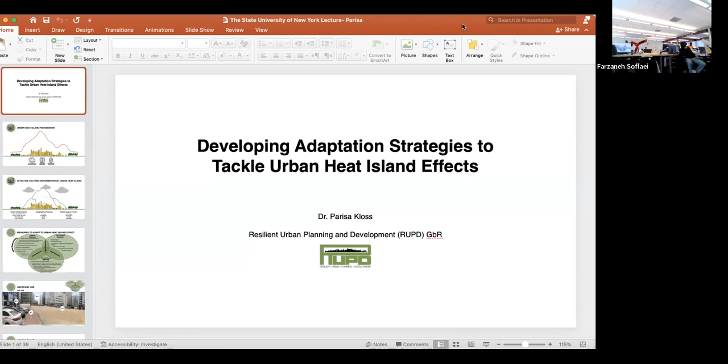So we are happy today to have Dr. Parisa Kloss. Dr. Kloss is a trained architect and urban designer and planner with more than 20 years of experience in the Middle East, Asia, Africa, and Europe. She is also the founder and executive director of Resilient Urban Planning and Development in Berlin, Germany. Parisa is an expert in urban climate change planning, urban heat island effects, and sustainable and resilient cities. She also has some collaboration with UN Habitat, United Nations Habitat, as an urban thinker.

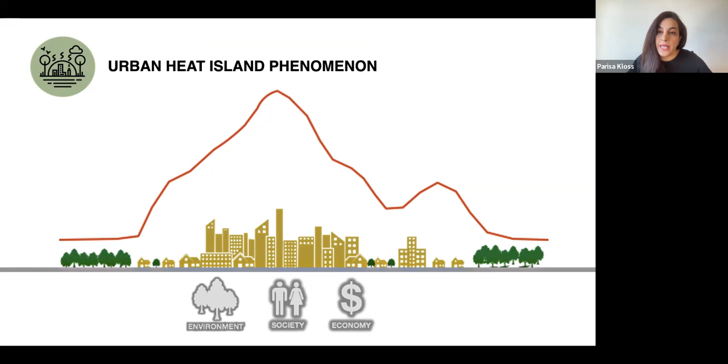It can impact social aspects of life, like the health of the citizens, so it can be a tremendous threat, especially for vulnerable people like the elderly, children, or people who have serious health issues. Or it can impact economic aspects of life, like waste of natural resources. For example, higher temperatures in cities increase cooling energy consumption and water demand for landscape irrigation. This will increase the peak electric demand. As a result, we need to produce more energy, and this will trigger the release of more greenhouse gases due to combustion of fossil fuel.

The exact form and size of this phenomenon varies in time and space as a result of urban characteristics, locational, and meteorological factors. Basically, the urban heat island morphology is strongly controlled by the unique character of each city.

Do you have any question?

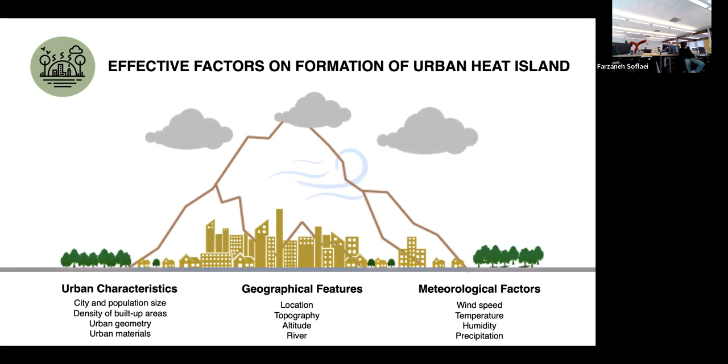No, we are good. No questions yet. Yeah. Yes, sure. If you want to ask any questions, you can interrupt me, no worries. No, we are good now.

Okay, so basically, how big is our city? How is the population size? How dense is our city? How is the urban geometry? The materials that we are using in urban areas, are they low albedo materials or high albedo materials? They are dark. What is the albedo? Albedo is the rate of reflectivity of the materials.

If we have higher albedo materials, it means they can reflect the solar radiation and send it to the atmosphere and try to cool down the city. And they're not absorbing it and emitting it after sunset, creating these higher temperature differences between urban and rural areas that we call urban heat island. And even urban activities in urban areas can be responsible for the urban heat island intensification.

Or where in this world are cities located? Is it near the river? Is it near the sea? How is the topography, the altitude? Is it surrounded by mountains? Or meteorological factors? How strong is wind speed in our cities? If we have a strong wind speed, it can take the pollution and also heat out of the city and cool down the city.

If we have a low wind speed, it can contribute to accumulation of heat and pollution over the city and create a dome of stagnant warm air over the heavily built-up area and increase the intensification of urban heat island. Temperature is going to help intensify the urban heat island, humidity, precipitation. So there are different factors that can contribute to intensify urban heat island. But I'm not going through each of these factors, but if you have any questions, I can open it up.

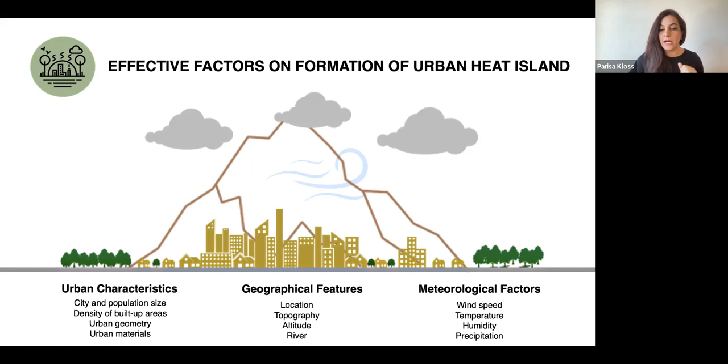And I would like to immediately dive into the measures that we are using to adapt to the urban heat island effect, and then introduce you to projects that might give you some ideas for your design project. This is the classification that I did. I divided different measures in three categories: physical measures, technological measures, social and cultural measures that we can use to tackle the issue. But actually, this is my classification. You can come up with a new classification.

For example, physical measures, like using building greens, green walls, green roofs, urban green areas connected to gray infrastructure, green corridors, street trees, house gardens, parks and natural green areas, community gardens and green indoor areas. Blue areas like rivers, lakes: if you have a river in your city, you can bring a part of the river into that target area and cool down that urban area a little bit. Using natural material or high albedo material, permeable surfaces, cool roofs, cool pavements, using different shading devices.

These are the general physical measures that you can use, but depending on the context of your city, you can come up with new or even innovative measures to tackle the issue. We are not saying that you should definitely use these measures. But these are the general, already proven measures that you can use in your cities. And these green and blue measures can be classified under nature-based solutions, that we call NBS.

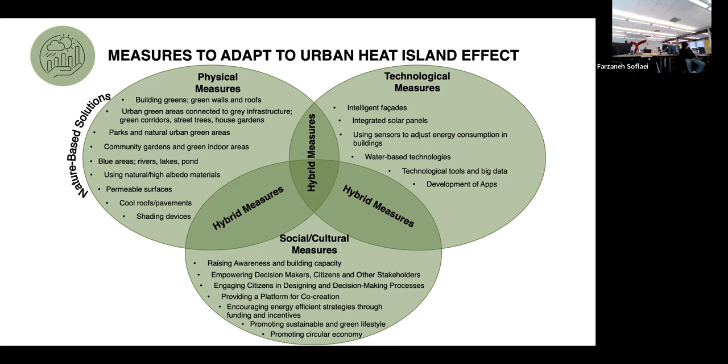I'm always saying don't put all your eggs in one basket. Try to distribute them, because if you are choosing different kinds of solutions, they can have more impact on that area. And the other category of measures is technological measures, like using the intelligent facade that can adjust itself based on the solar radiation, and also integrated solar panels. But again, it depends on the context of the city. How robust is our infrastructure? How robust is our system that can accept another technology on top?

Is the infrastructure not vulnerable, or if we are integrating another technology on top, can it be more vulnerable? In that case, we have to upgrade our infrastructure and then integrate technology, or integrate technology for the new buildings from the beginning, or use sensors to adjust energy consumption in buildings, and water-based technologies,

technological tools and big data. We have two different technologies that we can use: for example, using technology as a physical measure that can be integrated in infrastructure and systems, or using technological tools and big data that can help us identify the hotspots in the city in the best way, and take sustainable and smart actions toward the reduction.

So basically, this technology has already improved and can give us opportunities to facilitate or ease the process of identifying the challenges, and also developing different scenarios to tackle the issue, or developing different apps, like, for example, where are the hotspots, when is it hot, when we shouldn't go out, or what kind of clothes we have to wear. These kinds of apps also exist that can give us ways to avoid some health issues, especially for the people.

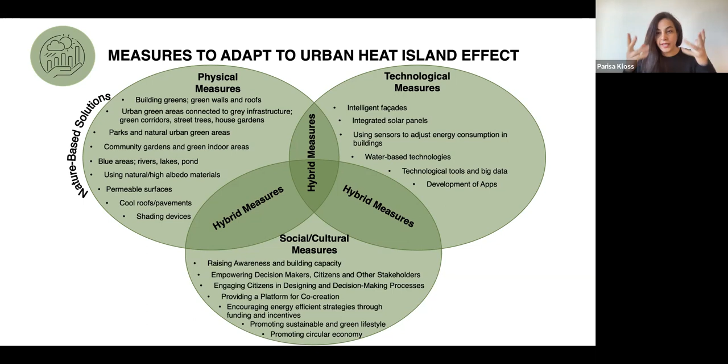I have selected 4 projects to present here. 2 design-based projects used more physical measures, and 2 technology-based projects mostly use technological tools to develop a platform to identify the hotspots, prioritize them, and develop scenarios to tackle the issue. So maybe these projects can give you some ideas. Sorry. So the first project that I would like to introduce to you is located in Abu Dhabi, United Arab Emirates.

The measures that we use in this project are mostly focusing on green and blue strategies like nature-based solutions. We also use natural and high albedo materials, permeable surfaces, different sorts of shading devices, as well as water-based technology. So I'm going to introduce you to this project here.

Can I just jump in for a second? Yes. Because I don't know what Celsius or centigrade means, so I just did a quick conversion. 39 degrees is 102 degrees Fahrenheit. I just want to put that out since that's what our students will understand. And 60 would be 140.

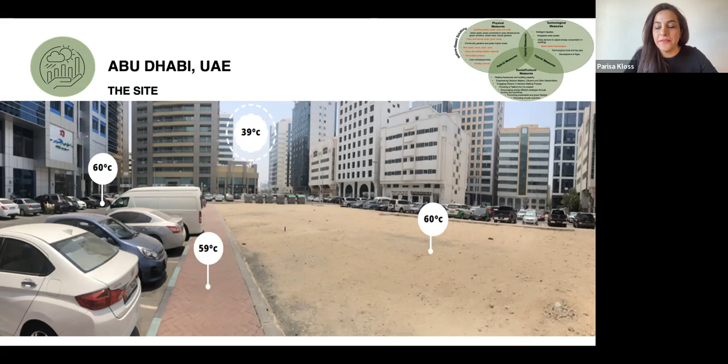Yes, and sometimes it can reach 80 degrees centigrade, and you can give it a try. If you are in a really hot urban area, you can cook an egg on top of the asphalt. This is also one of the issues in these kinds of areas. So you can see that this is the site that we have to intervene. It's surrounded by buildings. It's a jungle of buildings, and the greenery is already crowded out.

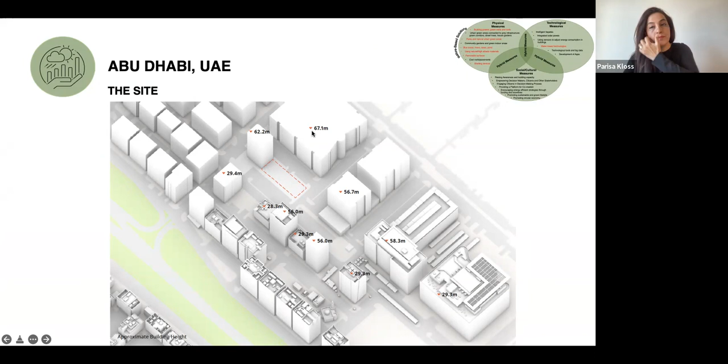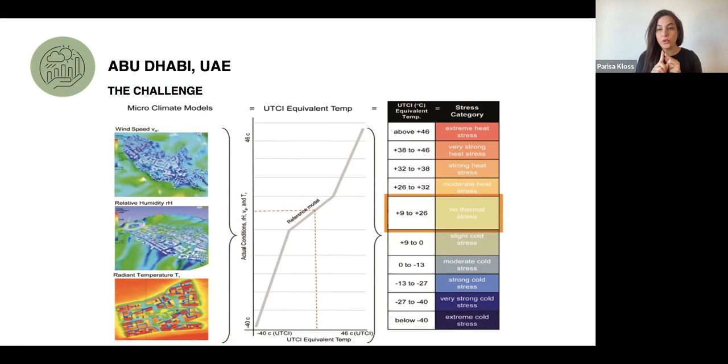The height of these buildings ranges from 28 meters to 67 meters. The challenge in Abu Dhabi is that throughout the year, Abu Dhabi experiences a wide range of thermal stress levels, ranging from 9 to 26 degrees centigrade to above 46 degrees. So one of the biggest challenges in Abu Dhabi is extreme heat stress that we have to tackle. It's happening between April to October, the hottest months of Abu Dhabi.

Before we started our design, we looked at different local architecture, structural elements, or even phenomena that can help us create a structure to cool down the city, coming from that context. So we were inspired by oases to mitigate the urban heat island effect and provide thermal comfort and a pleasant environment for inhabitants. The oasis is a phenomenon that occurs in desert areas, which is also the case in Abu Dhabi, and so we were inspired by that.

An oasis is a green area in the middle of the desert, centered around a natural spring or a well. It is almost a reverse island in a sense, because it's a tiny area of water surrounded by a sea of sand or rock. The oasis effect refers to the creation of a local microclimate that is cooler than the surrounding dry area due to evaporation or evapotranspiration of a water source or plant life, and the higher albedo of plant life than bare ground.

So we were inspired by this oasis, and we tried to create another oasis in an urban area, not in the desert. Here you can see in this picture our oasis in this urban area surrounded by these buildings. We tried to design a public space with different functions, with a 40 meter structure that combines physical and technological measures to achieve high impact in that area. We tried to tailor modern architecture and state-of-the-art technology to the local context through the structure, shape, and its details.

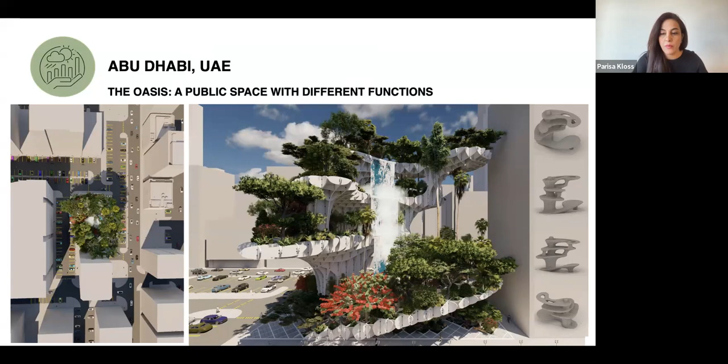So located between buildings, the oasis also creates many environmental, economic, and social, as well as aesthetic benefits for the local neighborhoods. So we try to see all the aspects of life. It's not just that we're trying to mitigate the urban heat island effect and have environmental impacts. If we want to achieve the sustainable development goals, we have to consider all different aspects of life in our design.

So this project could mitigate the urban heat island effect and cool down the urban area by distributing greenery onto different levels, or by elevating the oasis. Evapotranspiration is increased, which contributes to creating lower temperature spaces in an urban area. And since the urban heat island occurs at different levels, this is also really important.

We have to think that the urban heat island is not happening only in the air. It's happening on different levels, ranging from subsurface to the air. So the elevated greenery can mitigate the urban heat island effect at all the levels through the vertical mixing of air, and can improve air quality indirectly through the reduction of surface temperature, and also reduce thermal air movement.

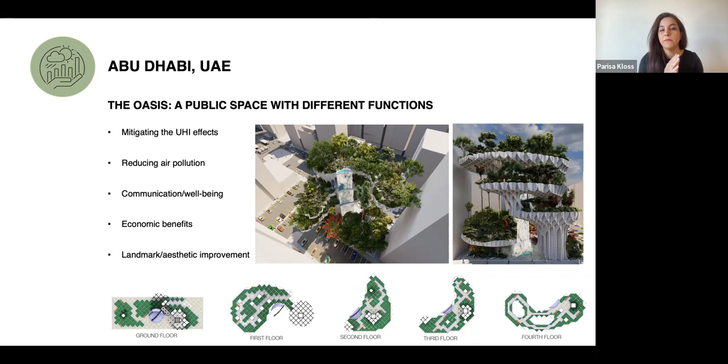And last but not least, aesthetic improvements: this project would also help with aesthetic improvement. It is like an urban landmark that offers a surprise for pedestrians and also attracts tourists through its unusual and utopian appearance. And I would like to show you a video of this building that can give you an overview of how this building looks from different angles. And what I explained, maybe you can see it in this video.

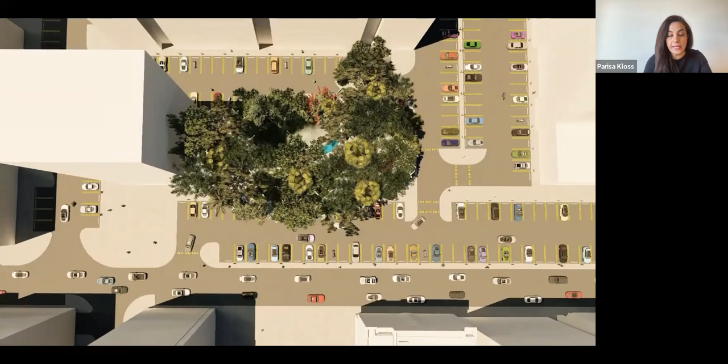Actually, from an urban climate change planning point of view, the structure can interrupt microclimate changes in the urban canyon through its shape and characteristic. You can see it in this video, decrease the anthropogenic heat and the energy consumption in the surrounding buildings that I already mentioned. And the place offers a real surprise in that urban setting for people who stumble across it accidentally, and becomes a meeting point for various people, as oases have been in the past.

In fact, these sorts of surprises can act as a magnet and distract the people from the harsh, still urban area with hot climate, and it lets them enjoy a comfortable, cool zone, as well as it increases the inhabitant satisfaction and their health.

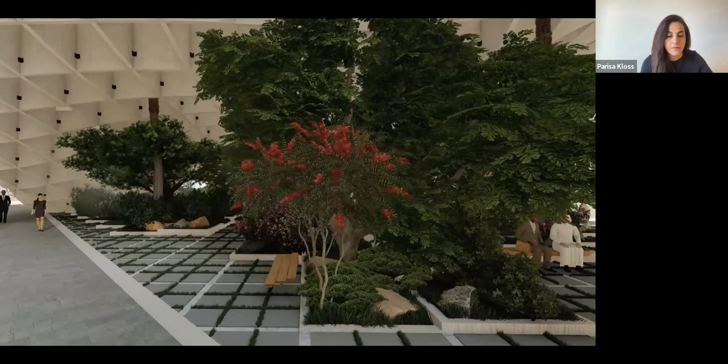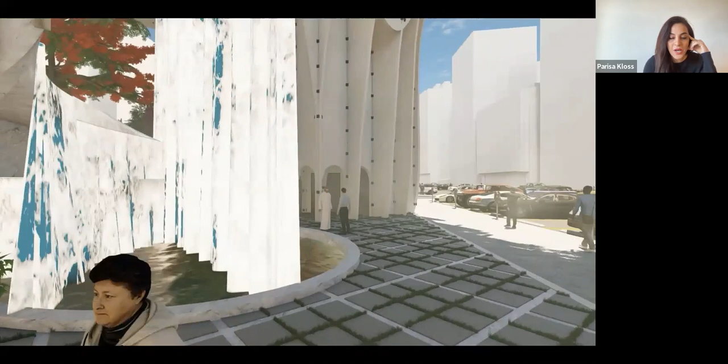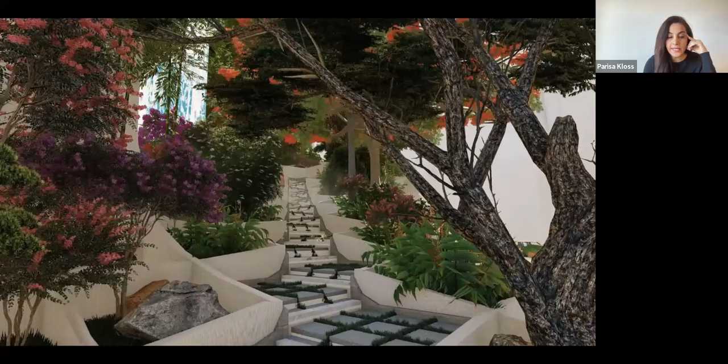However, it is impossible to tackle the urban heat island effect in whole Abu Dhabi just by implementing one project in an urban area. For this reason, we also thought about the replicability of the idea, and the hollow and prefabricated structure that you can see here has the potential to be extended, adjusted, and replicated in various urban areas based on the form of the vacant land that we want to intervene.

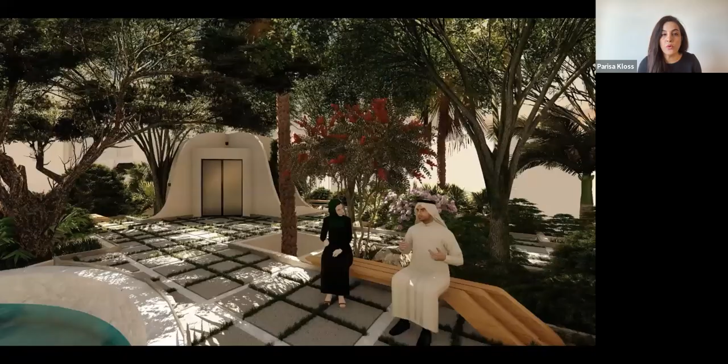This can provide plenty of urban oases and lungs to let the city breathe, cool down, and move towards urban climate change resilience. And you can see here we also use the local greenery and try to provide shadow, and also we use water to cool down this part, as I already mentioned, by using the gray water from the surrounding buildings. So this was the Abu Dhabi project.

Is there any question until now? No questions yet, I don't think.

Okay. Next project I would like to introduce you is located in Greater Cairo, Egypt, in one of the unplanned areas, or we're calling it informal settlement area of Cairo, called Imbaba. Imbaba is selected as it is a prototype for highly dense unplanned areas in Greater Cairo. In this project, we use also mostly green and blue measures, as well as shading devices, permeable surfaces, high albedo materials to decrease the temperature in this part of the city.

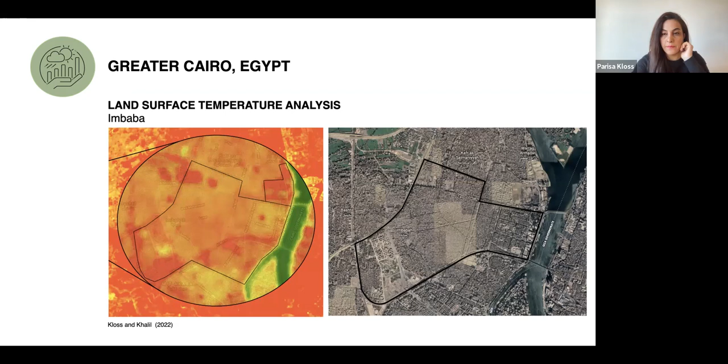So before we start designing or coming up with the idea, we also took a look at the different traditional architecture or elements of Cairo or Egypt to see what they traditionally use to cool down the city. So we found out there is one structure called Takeeba. Takeeba is a kind of wooden structure, and it's covered with plants to provide shade and breeze for cooling down and relaxing on really hot days of summer. And traditional material that they use for Takeeba is mostly palm trunks and fronds.

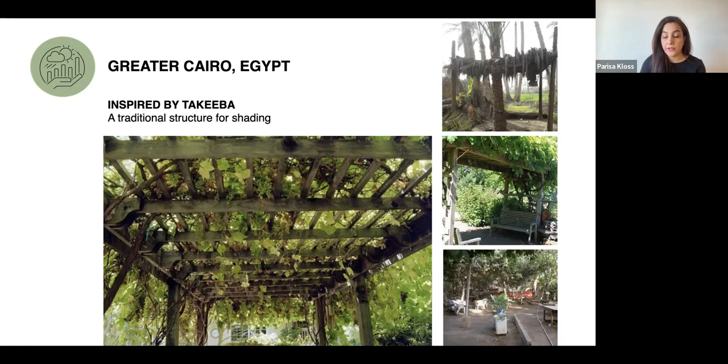They're really common. And we used this concept as one of the elements in the whole process of design, from details to generalities. So here you can see we try to design a chain of cooling public spaces from this vacant land along the Nile that I already mentioned, and trace it a little bit in that urban area and reach the other vacant lands in the north and south part of the city.

So here is the idea that we came up with for the vacant lands along the Nile. Actually, I should mention before that this project is still in process. We came up with some ideas. We published this idea in one of the books. And then, because of the lack of time and budget, we are constantly raising funds, and we are trying to continue this project, which I will mention later as well.

So by designing this chain of cooling public spaces in different scales, we try to provide thermal comfort for the inhabitants, especially the people who are vulnerable to climate change and have less access to basic services and infrastructure. The people who are living in the informal areas are somehow struggling with less access to basic services and infrastructure. By creating this kind of public spaces, we can provide opportunity for them to actually use this kind of spaces to decrease their vulnerability and also increase their health conditions.

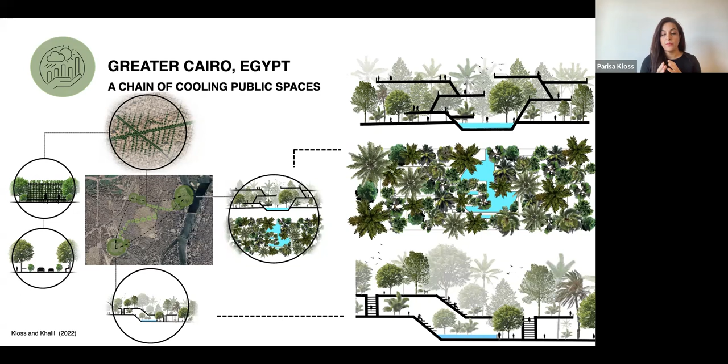And also utilizing the different greenery levels and its garden as terraces for human interaction can contribute to the renewal of urban areas. And this structure will provide maximum shading, good viewpoints, and cozy places to relax and interact. So visual and physical contact with plants can help the health of the people.

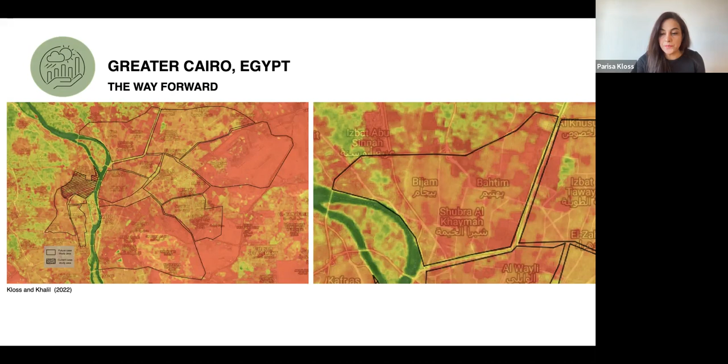However, it is impossible to tackle the urban heat island effect in entire Greater Cairo. So, as I already mentioned, we are constantly trying to raise funds to constantly work in different urban areas of Greater Cairo, both planned and unplanned areas. And here is one of the areas, Bahtim, located in this part. This is our next project, where we are trying to design a public space in that area with a group of students in Cairo University, and I also have another lecture tomorrow with them. And we are trying one by one to come up with ideas for different urban areas in Cairo.

These 4 projects that I'm introducing to you are each different and give you different ideas. For example, how we can design in informal areas, in unplanned areas, how we can design in a really modern city, how we can use technology tools to identify the hotspots. So basically I put 4 different projects so that you can come up with more ideas, or maybe get more hints based on that.

And the next project is located in Tehran, Iran, in one of their urban districts, Urban District 6. In this project, we use mostly technological tools and big data, as I already mentioned, to identify the hotspots, prioritize them, and take sustainable and smart actions toward their reduction. And we also use urban greenery, green corridors, cool pavements, cool roofs, shading devices.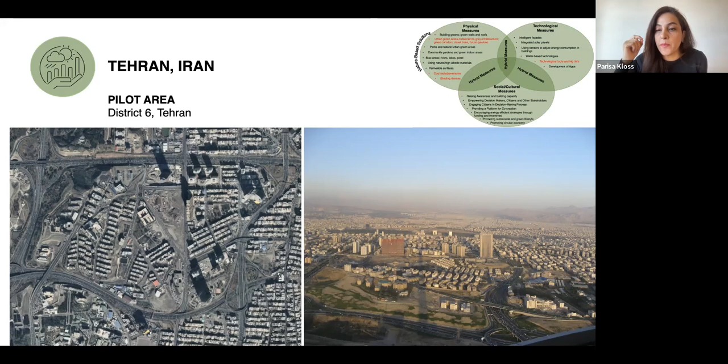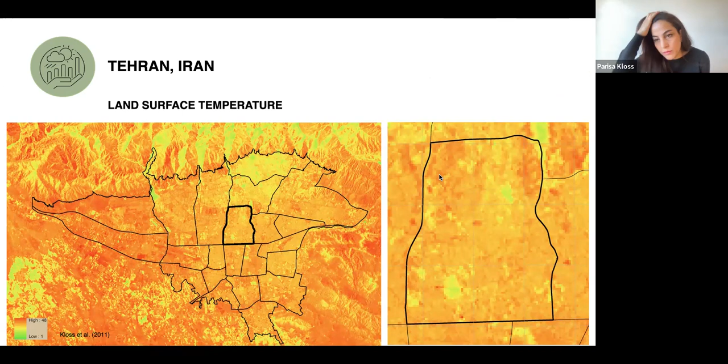But in this project, I would like to tell you the scenario that we developed for using different kinds of shading devices. Not only concentrating on the greenery, but also the other measures, to show you how we're actually testing different scenarios and choosing the best one that has the best impact on that area. So first, land surface temperature can give us the general overview, finding out where exactly the hotspots are, from the land surface temperature point of view. And then we choose one of the hotspots, which is located in this part of Urban District 6.

And then we use a spatial climatic analysis. The analysis is a kind of computational platform to identify the hotspots, or let's say to map the climate on urban fabric and building skin. Heat is not just happening on the 2D surface, like for example roofs and streets. It can also happen on vertical levels, on different facade openings or shading devices. So we have to use a kind of spatial climatic analysis that can give us an idea of where exactly the hotspots are.

So here you can see the really dark reds are really hotspots, and also the roofs of the buildings are really hotspots, because in Tehran they're mostly covered by asphalt, which absorbs lots of solar radiation during the day, and they're really hot. So as I already mentioned, there are streets that are really hot. We use green corridors to decrease the temperature in that part. But here I would like to concentrate on one of these scenario developments. Here is a residential complex called ASP. And this roof is a kind of terrace.

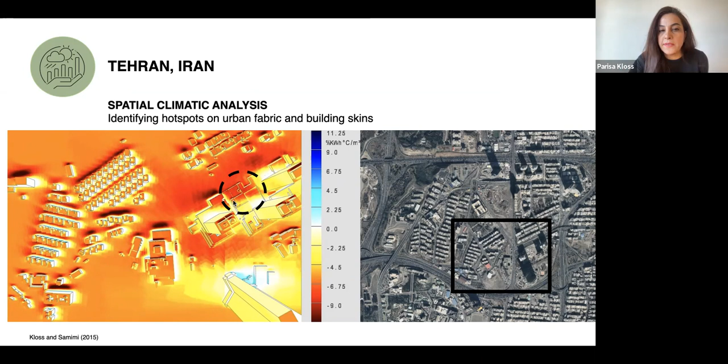It's one of the terraces that looks really hot. So we try to test the different shading devices in that part to decrease the temperature there. In order to do that, we have to develop different scenarios, to test how different forms, orientation, height, and volume of shading devices can impact that hotspot.

For example, here you can see that we test different sizes of this shading device. And here you can see that by increasing the size of the shading devices, it can have better impacts. And then we test different orientations, which orientation can give us the best impact.

And then the next one, we try to test which height can give us actually the best impact. Here you can see that this height with this form and this orientation has the best impact on that hotspot and creates a really big cool spot under the shading device. And also when you're standing in the middle of that, you can be safe from the reflection of solar radiation from the surrounding buildings or areas.

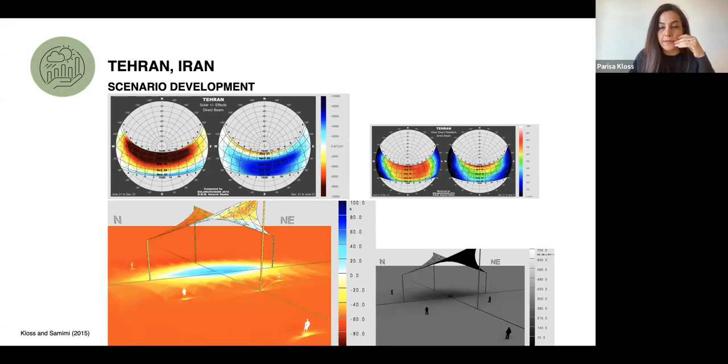And another project, the last project that we did, is in Montreal, Canada. This project is a bit different from the other projects. It's using spatial climate analysis that can help us to perceive the challenge more clearly in various dimensions. Again, we use technological tools and big data to create a three-dimensional climatic model for the city of Montreal.

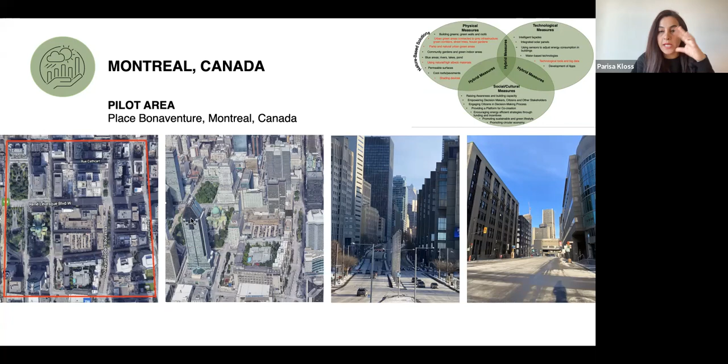So we chose a pilot area. Our pilot area is located in Montreal downtown. It's called Place Bonaventure. Here you can see some pictures that can give you some overview. And then I'm going to introduce you to this initiative that we started in Montreal.

We started developing a model that performs through a computational platform called SOLARCHVISION to optimize the climatic performance of the city from various dimensions by applying spatial climatic analysis. This helps us to identify the hotspots, study them, develop potential corrections, and then evaluate the most suitable ones. So we are calling this model the 5-dimensional climate scenario model. Why are we calling it 5-dimensional?

Because this model is based on the 3D model of buildings, shading devices, trees, and topography. And the 4th and 5th dimensions are shaped along climatic and weather data of the location in different hours and seasons. So basically, this model will be able to provide a comprehensive platform for the city. It can document the existing climate stress in the city, where exactly the existing hotspots are located. And it can help us predict the improvement potential by developing different scenarios, as well as assess their climatic impacts on surrounding areas by placing new designs into this model.

So basically, when we are designing a building, maybe this building alone is completely sustainable and has a perfect climatic performance, but as soon as we put this building in an urban area, it shows a completely different climatic performance. So it means that we have to see the whole system together. It's not just about one building, but whole urban areas, and how this single building can impact the surrounding area and vice versa. And last but not least, this model can serve as a base for future construction projects, or one of the bases for granting construction permits, in the hands of the municipality.

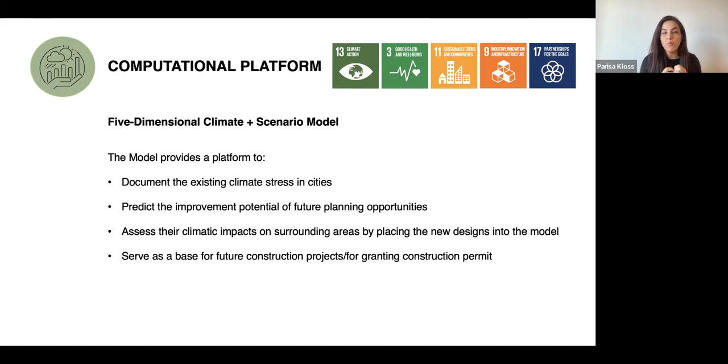So basically, this model enables cities to take accelerated and more ambitious climate action. This is our aim. We started this initiative in Montreal, and this project is still in process, and we are trying to expand it in different parts of the downtown of Montreal. And as I already mentioned, we chose Place Bonaventure as our pilot project.

And how we chose it: to select the pilot project, we used remote sensing to orient ourselves. We mapped land surface temperature, which can give us a general overview for quickly finding critical points of the city, the points that are exposed to solar radiation and absorb more energy. Then we zoomed in and analyzed the areas to find out where the high risk areas are, prioritized them, and then took it to the next level, which was development of the three-dimensional model.

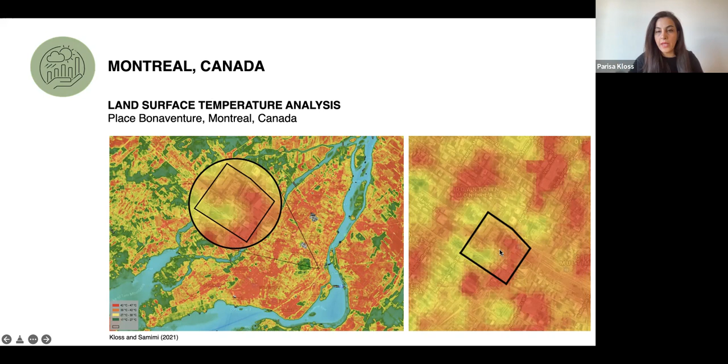What you can see here is Place Bonaventure. The whole of Montreal is suffering from hotspots, but we just concentrate on the downtown of Montreal, which is located in this part. Place Bonaventure is one of the urban areas in this downtown area. As I said, this is a pilot project, and we are trying to extend it to the whole downtown of Montreal.

Before we start mapping the climate on building skin and urban fabric, we carry out lots of climatic analysis. So this model has strong scientific evidence behind it. We are going to publish it in one of the books that is going to be published in Japan.

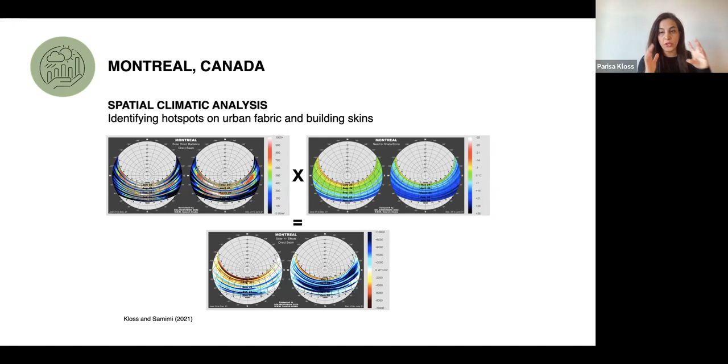So to find the hotspots, we have to bear in mind that the hotspots are not just the spots that are absorbing solar radiation. These hotspots are direct solar radiation multiplied by the need for shade and sun. If we multiply these two factors together, we can get the negative and positive impacts of the sun, which are our hotspots. After analyzing that, we map it on the urban fabric and building skin.

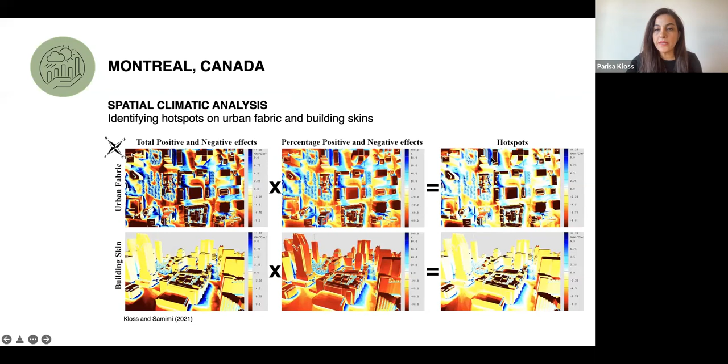Here are the hotspots; here you can see them better. We found out exactly where the hotspots are, so you can find the climate stress in the city. Mostly the roofs and some parts of the urban area are suffering from hotspots. You can also see the blue spots here, where the buildings create shadow because of their orientation and volume. They were effective and could provide this shadow in the really hot weather of Montreal.

Basically, Montreal suffers from extreme weather. They have really hot summers and really cold winters, so it's a kind of extreme weather that we have to consider in our design. So this is the model for this pilot area, and we are going to expand it to the whole downtown of Montreal.

This model can be in the hands of municipalities. As I already mentioned, they can document the existing climate stress in the city and come up with different scenarios to solve the problem in these hotspots one by one. And also, this is really important, placing new buildings into the model to assess their climatic impacts on surrounding areas. Because a single building can perform perfectly alone, but as soon as we place it in an urban area, it shows completely different climatic performance.

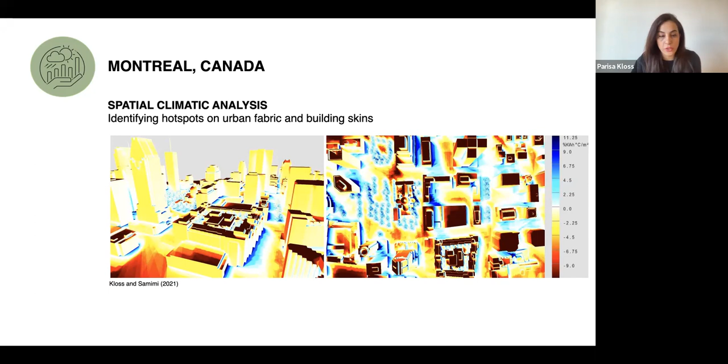And next, I would like to introduce one of the scenarios that we developed here. Here is one of the hotspots in Montreal, in the Place Bonaventure area. We tried to integrate different greenery with this shape and style, and we could decrease the temperature by up to 5 degrees centigrade in this part of the city.

And you can see from a different angle here, here's the hotspot, and by placing the greenery, we could decrease the temperature in this part of the city. Actually, Montreal, or Canada in general, is not suffering from a lack of water, so we didn't have a problem integrating greenery as much as possible. So this is one of the advantages of having lots of water in our cities.

So this model that we created could bridge lots of gaps. It could bridge the knowledge gap, empowering policy and decision makers to take sustainable actions. It's not just about the decision makers; practitioners, urban planners, or even students can use this kind of model to make a sustainable design and take sustainable actions in their projects.

And it can also bridge the technology gaps. Basically, technological tools can help us better identify our challenges, communicate better, and prepare for and manage any crisis in an uncertain and sophisticated environment. So in this regard, technology acts as a supportive tool to ease and facilitate the process of perceiving challenges in a very complex system.

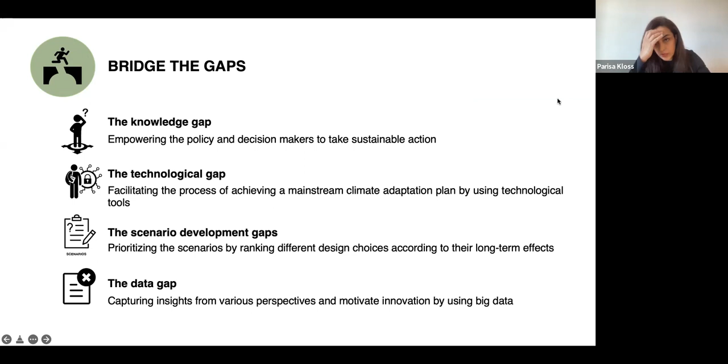It can also bridge the scenario development gaps by prioritizing the scenarios, ranking different design choices according to their long-term effect. It can help us actually find out the best solution. And it also bridges the data gap.

We are using big data, capturing insights from various perspectives and motivating innovation by using big data, but actually we have to think about it: let data inform you, not lead you. This is also really important. Data cannot tell you everything. You also have to use different kinds of approaches to complete that approach.